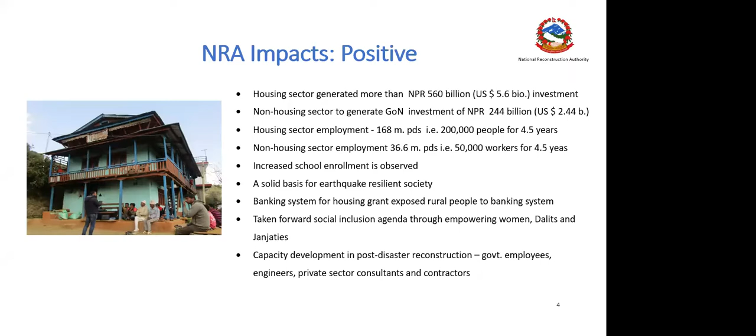There are also some negative impacts as well. For example, the earthquake-affected households: we are now getting reports that on average they spend 700,000 Nepali rupees, around 7,000 US dollars, per house, and they are indebted. That is the information we have been receiving from the ground. So this is a bit worrying, and we have to grapple with this situation. Government is really thinking about it, and most probably by the end of NRA we can think of some mitigating measure on that.

Similarly, vernacular architecture. Like everywhere, Nepal has people with different ethnic backgrounds, and their housing patterns are influenced by their ethnic background. That is gone now, because we have very standardized houses with CGI roofs, and there is uniformity of houses all across 32 districts. It is a bit worrying actually. Now, what to do with this architecture? We are now really thinking about this.

The next point is vulnerable households. We are taking care of vulnerable households, but this activity had to be done at the outset. Initially, we focused more on the reconstruction of housing, and vulnerable households were taken care of, but not emphasized the way they should have been. That is what, in our retrospection, we are thinking at present.

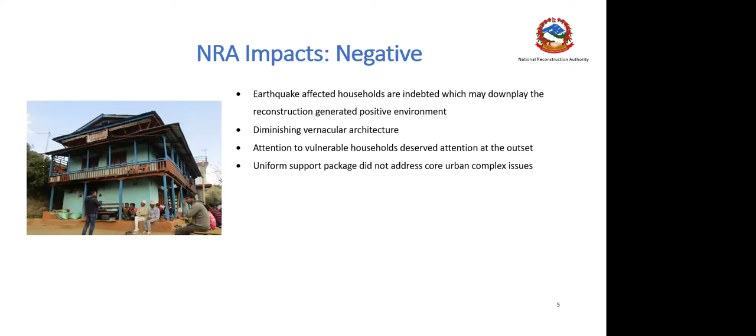Now I will focus more on retrofitting. I would like to give a timeline which shows how we handled retrofitting, and where the problem, the lacunae, was in this whole intervention. We promulgated the housing grant policy working procedure some time after the April 2015 earthquake, because we took time to formulate it, and it was revised in 2016. Actually, there was one typo: 2015 December 29 is the date for the housing grant, because NRA was introduced and immediately after that we introduced the housing grant policy as well.

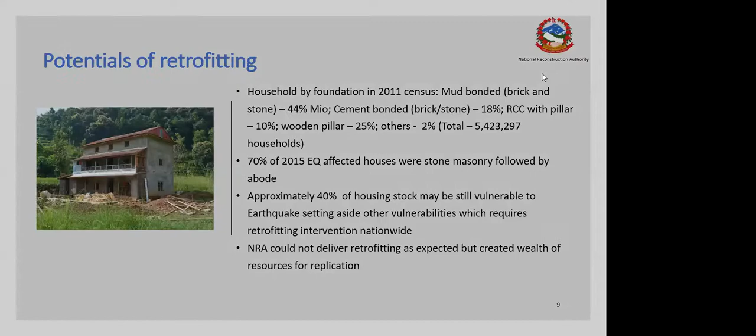I would like to show, before initiating discussion, what are the typologies of houses in Nepal. First is the stone mud mortar house, SMM. Another is brick and mud mortar. These are row houses typically in urban areas, particularly in Kathmandu Valley. Third is typical brick in cement mortar. There is no framed structure, but load-bearing structure, with cement mortar and brick.

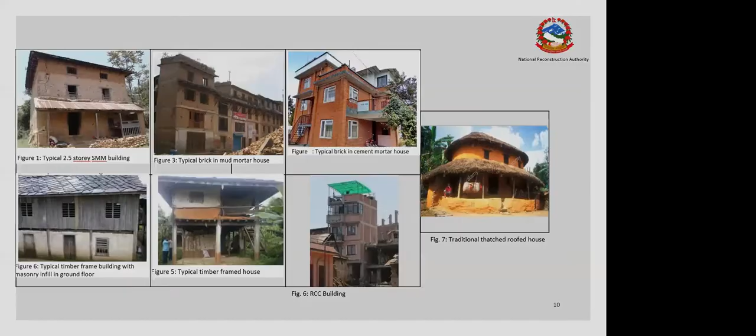So what did we learn from the retrofitting program during this intervention, effectively from 2018 until now? This is the very effective period, 3 years or so. What did we learn out of it? Retrofitting programs can be successful only if they are easily understandable by the local people.

People didn't really trust or believe that their cracked house can be retrofitted and can become habitable again. We could not convince a lot of them. We made a lot of attempts, but the communication was not there. They weren't really convinced with our message.

And the next is trained human resources like engineers as well as masons. At the initial stage, when they were not trained, they could not deliver retrofitting. They didn't get this skill before. It was not taught in the university, and we provided some 6-7 days training, but that training didn't really enhance their level of confidence. That's why unless we really train human resources, we can forget about retrofitting. So we need really competent hands.

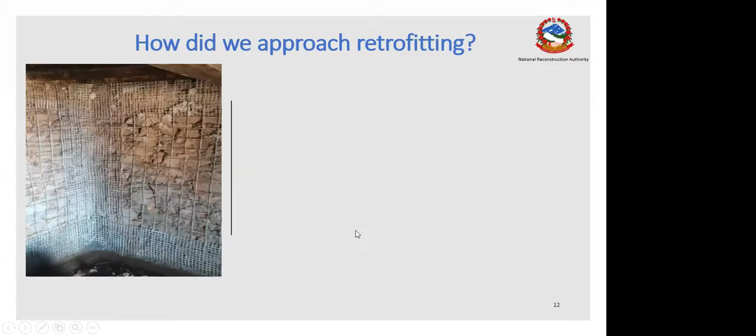And how did we approach retrofitting? This is a bit technical, but most probably the housing shelter forum must be familiar with this. I will not go into a lot of technicalities, but I would like to mention that these are the different interventions, retrofitting approaches we introduced in Nepal,

and hopefully you can also give feedback to us. And we are also looking forward to replicating this in the international community as well, so that you don't have to invest resources for inventing these approaches. First is strong back technology.

This is reinforced concrete strong backs. There are certain columns, pillars in specified designed spaces, and they are tied up with slab strips and ring beam. So this is quite a simple structure.

Inside the house, we create the pillars, and they are tied with each other, and there is through concrete connecting the inner and outer wythes. So that's how the whole structure is supported by the strong backs, the pillars. And cement sand plaster is applied on the wall. The application of cement sand plaster is applicable for all retrofitting approaches we have.

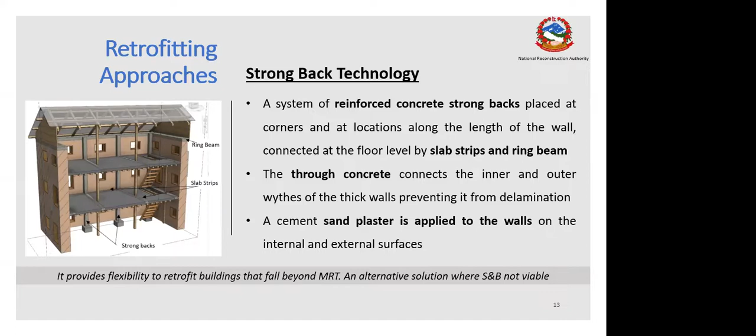So here, the difference is it introduces an RCC structure. So this is slightly different from other approaches that I'm going to explain later. And this is further explanation of strong back technology.

And light gable: the gable, we found, is the weakest structure for destruction. In the majority of houses, the gables were damaged by the earthquake. That's why we recommended a light CGI or timber gable, and improvement to the connection with existing timber elements. The connection with the existing timber elements is an extremely important aspect of this.

So you can see the photograph here. This is the pillar, in this corner also there is a pillar, and there is one tie beam all around the wall, and also one tie beam on the ground level as well. So this is how it is done. It is quite a simple structure, simple technology, but quite a robust one.

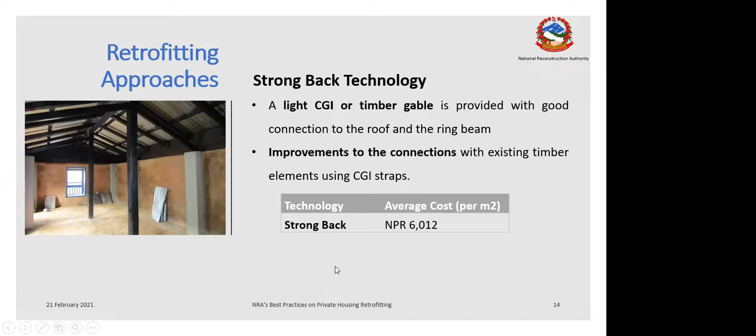Another we call mesh and splint bandage with local filler. This is the one which we introduced since the very beginning. In this technology, you can see that the whole house is covered with wire mesh, vertical splint, horizontal bandage. You can see the horizontal and vertical bandage, and then they are tied up with the inside structure and outside structure.

So technologically, this is also not complicated. It is quite simple. The construction materials are available in country, and now we have trained a number of masons as well for the construction of this type of wire mesh, splint, and bandage retrofitting approach.

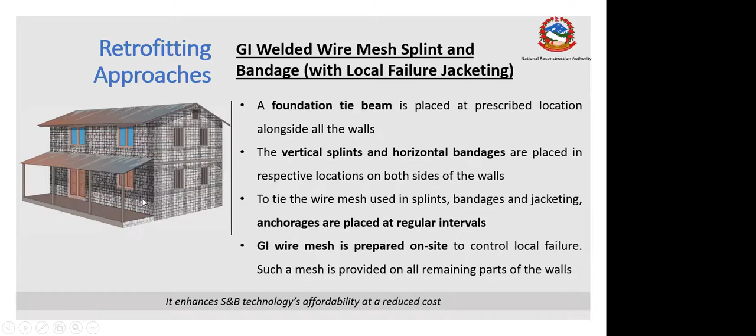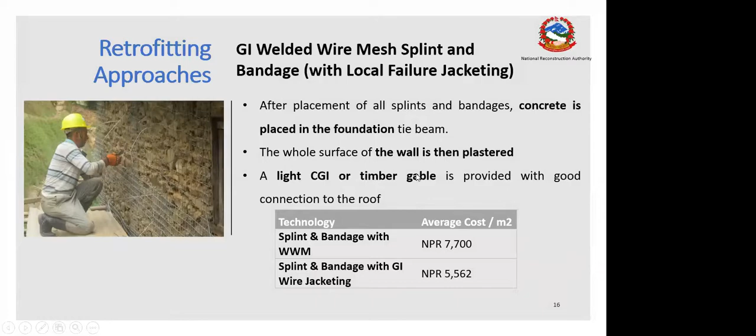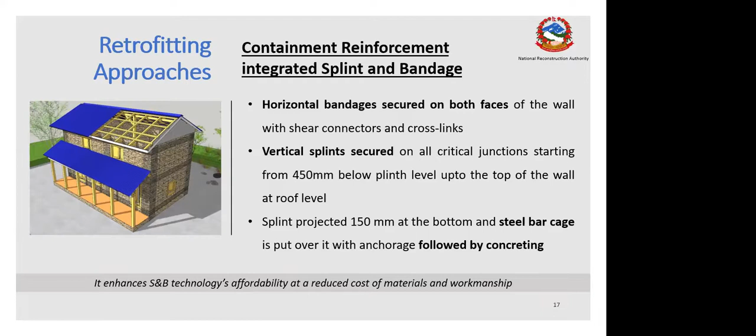Another is containment reinforcement integrated splint and bandage. This is a variation of splint and bandage. Basically, this is splint and bandage, with some elements included: horizontal bandage secured on both faces, and vertical splints. There are certain little extra instructions added in this containment reinforcement integrated splint and bandage.

And this is further detail of containment reinforcement integrated splint and bandage.

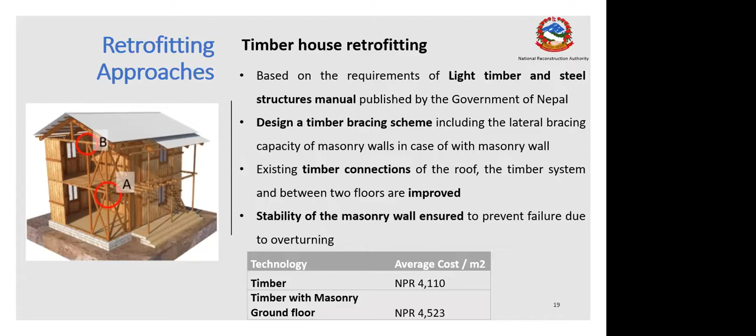And the next is timber house retrofitting. As I mentioned, the manual for timber house retrofitting was introduced in 2018. For this, we focus on how to make the timber structure robust, able to withstand seismic vibration as well as other loads. So mainly, connecting points are focused, and the load bearing capacity of wooden timbers is also very important for this retrofitting approach.

So what are our outputs? If anybody in the international community is interested, today we published 4 documents, which are going to be released tomorrow. One of them is the NRA experience on retrofitting of private houses. We also published norms, the roster, and the manual. So 4 documents are published today, and they will be released by the Right Honorable Prime Minister tomorrow. So this is quite a good day.

I am quite happy today because 6 documents are published in total, 2 journals not related to retrofitting. These are Progress in Disaster Science, an Elsevier journal, in which we published a special issue on Nepal's Reconstruction, and Vikas, a National Planning Commission journal. Plus the 4 retrofitting documents. So all these are resources for the national and international community, which can be used by anybody in Nepal and abroad, wherever required.

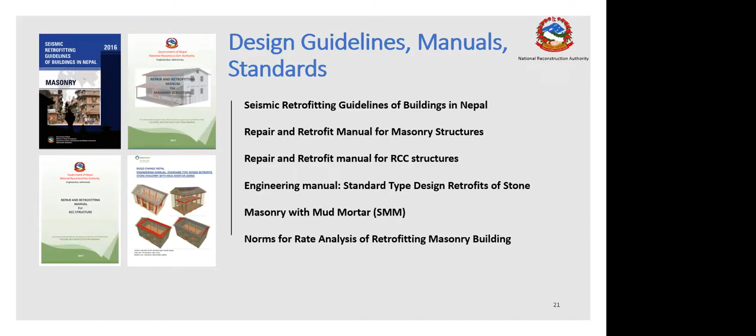In addition to that, there are quite a number of videos we have. We have public service announcements, booklets, posters, flyers, apps, and a lot of other resources we have developed.

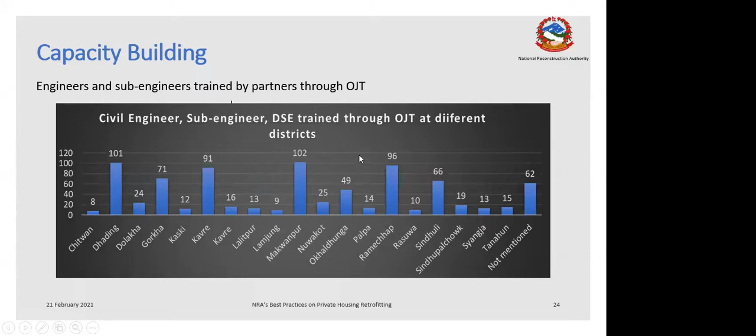We also train engineers. You can see the number of engineers given on-the-job training, including civil engineers, sub-engineers, and other types of engineers. Whether they are fully conversant on this is something else, but we provided training, and we are considering providing refresher training so they become competent enough to handle retrofitting in future.

In terms of capacity building, we provided the basic concept of retrofitting, different types of retrofitting technologies, as I briefly described earlier, design of retrofit solutions for masonry structures, inspection of retrofitted houses, and retrofitting onboarding and refresher training.

So a lot of training was provided, on-the-job and theoretical, to around 2,000 engineers, and all the trained manpower was recorded in a roster. We produced a roster of engineers and masons as well, and anybody interested in constructing or retrofitting their house can contact them. Masons, engineers, social mobilizers, all are involved in this retrofitting. We now have one complete roster so people can contact them to retrofit their house. So this is quite a good wealth of resources we have produced.

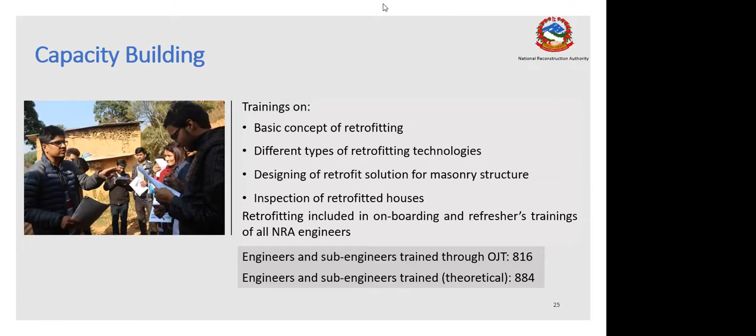And this is further capacity development.

Now I would like to spend a few more minutes on challenges and learnings. This is not challenge free, as everything is challenging. Retrofitting was rather more challenging, and the challenge has not been over until now. We will encounter this challenge further in future while trying to replicate it in the rest of the 45 districts. We are considering replicating this for other remaining vulnerable housing stock in Kathmandu and the 32 earthquake-affected districts, but there are a number of challenges.

The first challenge is risk awareness of the need for retrofitting. People living in the house don't realize the significance of retrofitting, because there's no apparent problem with the house, they are just living there. The problem will occur only when the earthquake strikes, but that is a future unknown, remote risk which people don't realize.

Also, because most people in rural areas are poverty stricken, they don't have surplus wealth to invest in the house. That's why they are not much tempted to retrofit their house. If the house is damaged, they would be forced to do something to construct new, but if they are just living there, they don't feel their house has to be retrofitted. And there's also the willingness of retrofit beneficiaries to transfer.

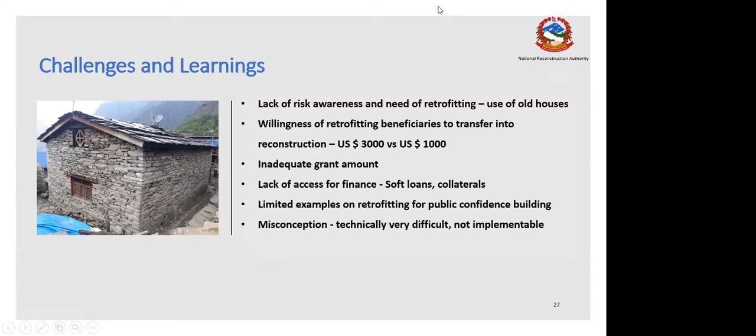There was a misconception that this retrofitting technology is technically very challenging and not implementable. The rumor was that engineers can't design it, and that it costs a huge amount of money for designing. There were a lot of different rumors going around, which made it difficult for us to communicate our message properly.

Further continuation of challenges: building code compliance and life safety. This is very important. Now we have a building code, and for the retrofitting guideline, the house must comply with the building code. With retrofitting, can we achieve that? Can it satisfy the building code? That is the real crux of the problem.

Within the policy-making body, there is one strong argument that retrofitted houses must comply with the building code. Another argument is about life safety: if the buildings ensure the life safety requirement, isn't that enough? Do they really need to satisfy the building code? This is the ongoing debate that we have to grapple with and resolve.

We are trying to produce some numericals on this, looking at different construction approaches we had, what type of building code compliance they achieve, what else we need to do, or whether there is any compromise in between. That is what we are now grappling with.

Next is limited viable technology. There are certain lacunae in our intervention. For example, how does a row house act in terms of retrofitting? I was very keen to pilot this idea of retrofitting for row houses, but that could not happen because of the COVID-19 situation. If COVID-19 had not been there, we would have experimented with retrofitting in row housing, and most probably by now we would have developed one clear methodology for it. Row housing means houses on the street in an urban environment. What is the load distribution of those street row houses? What are the consequences of one building's collapse on another?

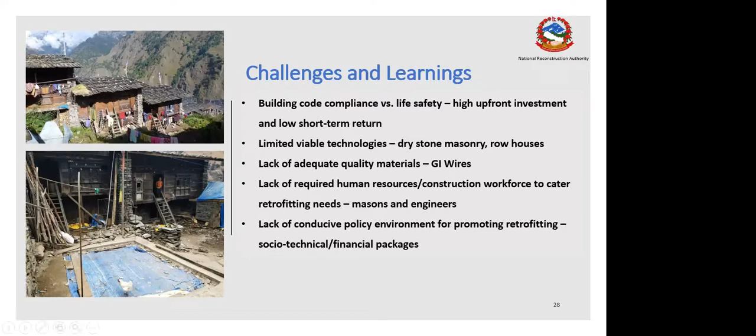And what is the way forward? I am happy to share this information, though it is not fully approved actually. After our workshop, we had one national level workshop on retrofitting about a month ago. After that, I have been working with the Ministry of Urban Development, encouraging them to have a national level program - it can be something like a pilot program, but it has to be nationwide. Right now, what we are considering is not approved. Just for your information, I don't want to give the wrong message that this is approved - it is in the process of approval.

If we can integrate and have provision for retrofitting in the government budget for next year, it will create something like a platform. We are considering integrating this intervention with the people's housing program. Government has launched a program for people's houses, meaning for vulnerable people, destitutes, or the very poor echelon of society. Government supports them to construct relatively safe houses - for example, if a person has a thatched house, government provides a grant to convert their roof to a CGI roof, because CGI roof is much safer than thatched roof, which is vulnerable to fire and has to be replaced every 2-3 years. So that program is there, and we are trying to integrate this retrofitting program with that program, marrying them together so that we can make a robust intervention.

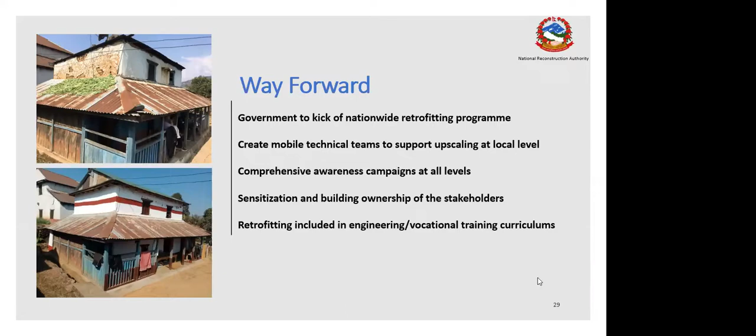There are quite a few more. I promised Alastair to finish within 40 minutes. It is exceeding a bit. Can I take a further 3-4 minutes, Alastair? Yes, of course. I think we have time for that. So yeah, thank you. Carry on. Thank you very much. So I'm approaching the end anyway.

So now another is the incremental retrofitting, because the retrofit of a full house is costing around 5,000 to 6,000, sometimes 7,000 US dollars. And that becomes quite expensive for the rural people. So we are considering incremental retrofitting. It means maybe the ground floor can be retrofitted this year. After 2 years, they can retrofit the first floor or so.

The houses are also constructed in that fashion in Nepal. If they have only a limited amount of money, capital, then they invest only for 2 rooms, and then they expand further. So that's how they do. And a similar approach can be replicated for retrofitting as well. That's what we are thinking of, and most probably we may come up with one methodology for incremental retrofitting pretty soon. And preparing ready-to-use design.

Because there was a rumor around that the structural engineer takes a huge amount of money, $200, $300, $400, which is not affordable for the rural, poor people. That's why we have to provide as much resources as possible to the people, ready-to-use designs for mass replication and upscaling. We are also considering that.

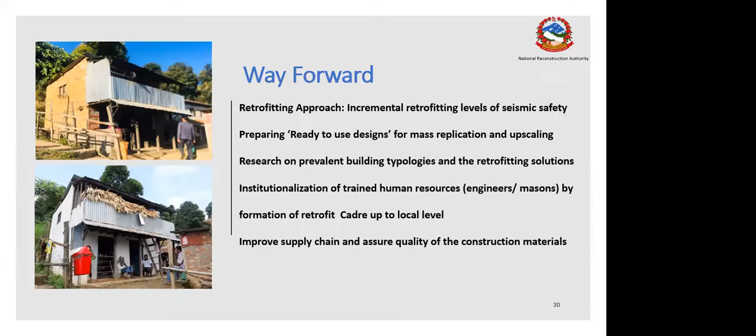So publishing the roster is also one step to that, so that we can constantly update that retrofit roster, so people know who is involved in this profession and can take their service. And improve the supply chain and secure quality of construction material. It is already there, but some improvement may also be required. With this, I finish my presentation. Thank you very much. Alastair, over to you.

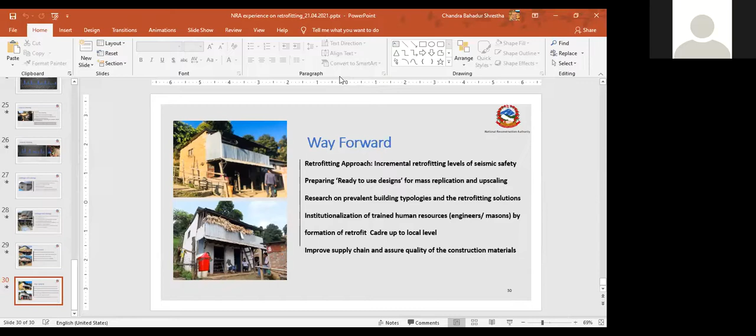Perfect. Thank you very much, Dr. Chandra, for a great presentation. So we'll now move on to the question and answer stage. We've got a little bit of time for it. I think the session goes on until 12:30, but we'll see how many questions come in. I close my presentation, yeah? Yeah, that's fine, Dr. Chandra.

So we've had a few questions come in on the chat. I'll start with those, and if people have other questions, please feel free to put them in the chat, or unmute yourself and ask Dr. Chandra directly. Starting with the first one, Marcin asked about the adoption of reinforced concrete and techniques in retrofitting buildings, and also on the uptake by communities themselves. I know you've got some experience of that.

Yeah, thank you very much, Marcin. If I understood your question correctly, this uptake of reinforced concrete is quite serious, in the sense that it is prevalent everywhere. If you go now to a far-flung hamlet in northern Nepal, or Okhaldhunga, Sankhuwasabha, wherever you go, concrete is introduced. People would like to go for concrete structures if they can.